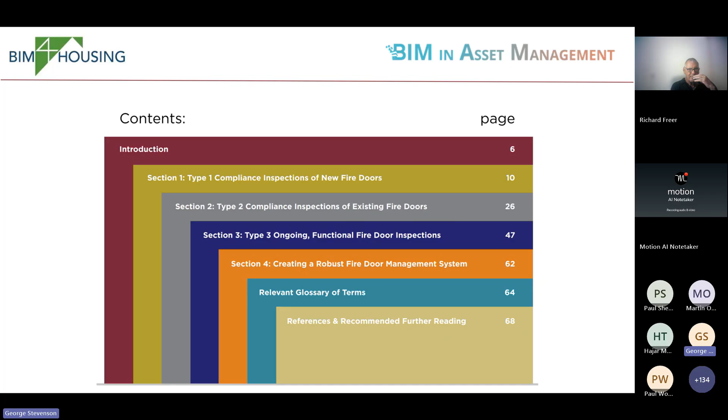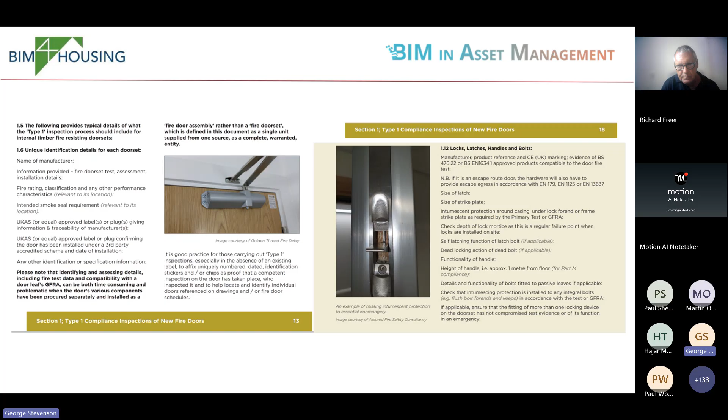Thank you. Cheers. Yeah, so right, in terms of what we've been doing recently, we've now got a new version of the fire door inspection platform guidance that we've been producing, which was developed originally with the NHS. So what we're asking people to do is to peer review this, because this is a new version of the fire door inspection document, and it's a really good document, and it goes into significant detail. So I'd like, if people are interested in doing a peer review of fire doors, could you put 'fire door review' in the chat?

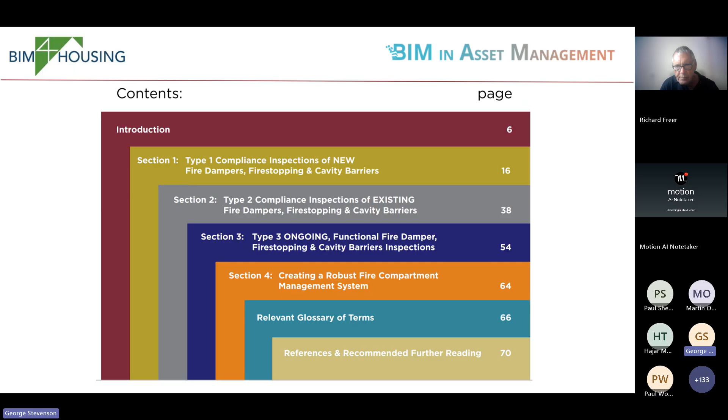The objective of this is to really get something that we can then feed into people, so we're upping the game. What we've also got is one for fire stopping and cavity barriers, so again we'd like people that have an interest in any of those asset types. If you'd like to be part of the peer review before the thing is published, please put your name, or put 'dampers and fire stopping' in the chat.

Okay, what we've also been doing - the whole point about this is to upskill the industry. So we've been working with the Supply Chain Sustainability School, which is an organization that provides free training to SMEs. It's funded by most of the big corporations, and many of you possibly are working for organizations that fund and support the Supply Chain Sustainability School. But what we're doing is using this to actually provide training, and we're doing this on the back of the various different groups that we've got working.

So for example, we've got the Digital Asset Capture group, and if you're part of that group, that's great, you'll probably see your name here. But if you aren't part of it at the moment and you want to be, I'm just going to step through a few of them. If you could put 'DAC', for example Digital Asset Capture - this is the same as 360s, by the way, so we talk about both - put that in and we'll invite you, and you can be part of that group.

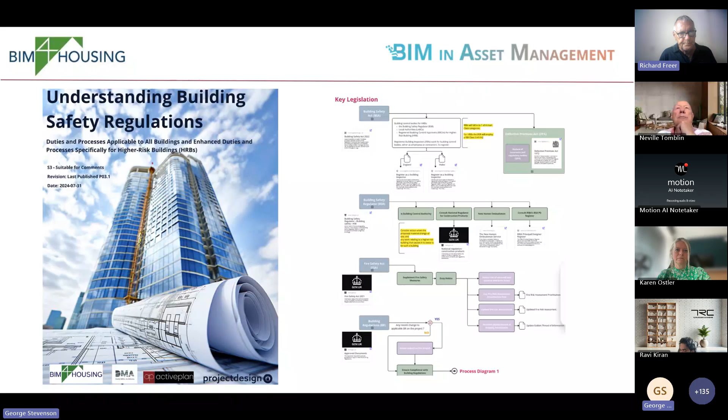This is the Miro board. It was created by a group of us in BIM for Housing, interpreting the new regulations in a common way, because everybody's got a different interpretation of what the regulations require us to do. So the Miro board was set up for the team to bring that together, and it's a fantastic resource. These are the people who have already registered. You can go on there, find information, and importantly ask for information too, and one of the other team members will probably be able to help you.

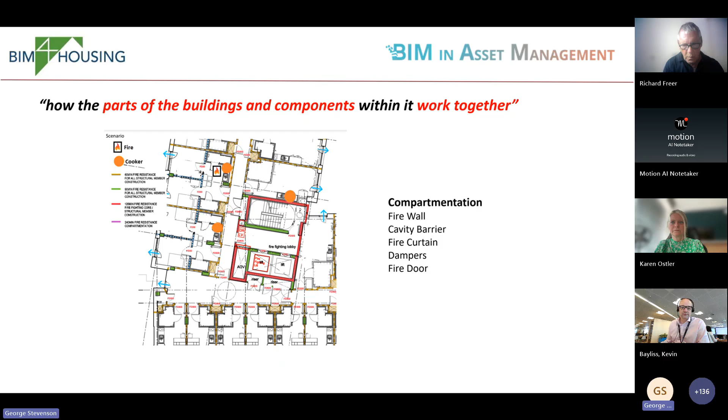Largely it's compartmentation, and the whole point about the golden thread, for example, is to make sure that all of the assets that go to make up a compartment wall are valid and working. The challenge is that we're getting, and it's great, lots and lots of golden threads being handed over at completion. But how do we tie them all together?

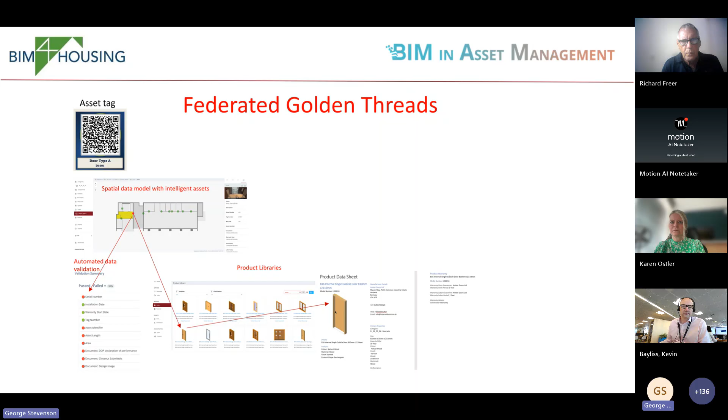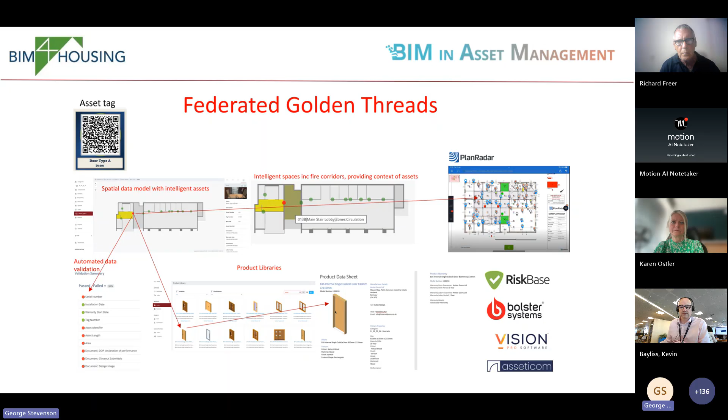How do we tie together the BIM models, the floor plans, which are often separate drawings, and then how do we ensure that inspections being done are actually going to pick up the same asset? And therefore, if you've got other really good software applications being used, they need to refer back to the same asset.

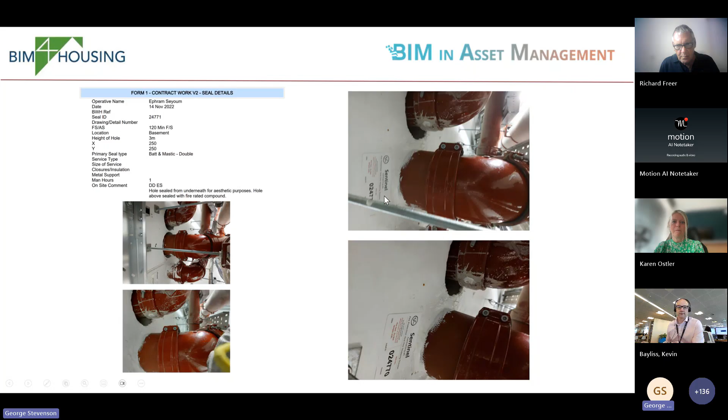So what we're doing now is using this to say, okay, the handover information may be perfect for handover. This is from a live job we've been doing with Places for People. The fire stopping contractors used an application called Boris, and really good records of what they've installed—they've barcoded every single fire stop, and you'd think that was fantastic.

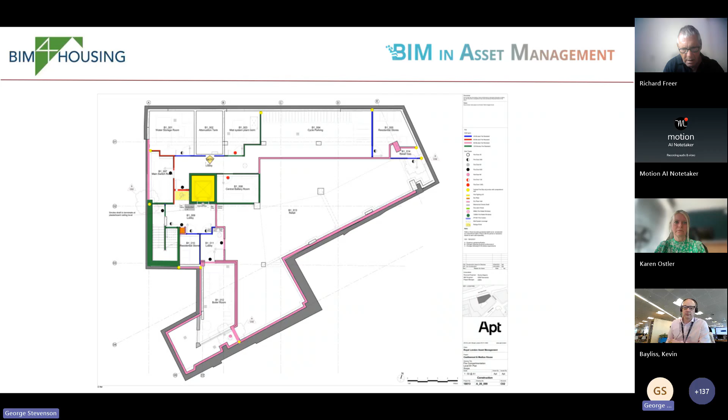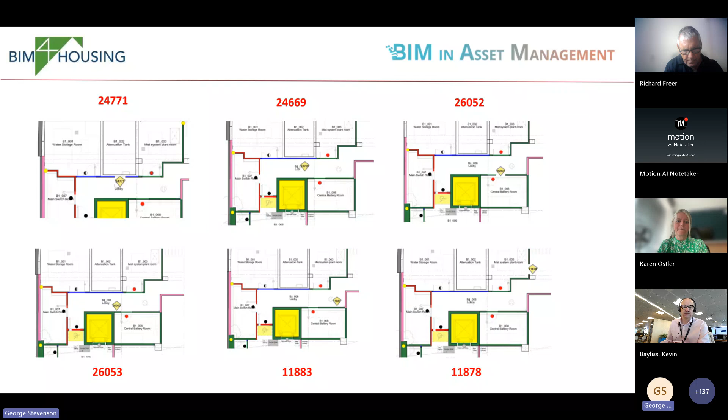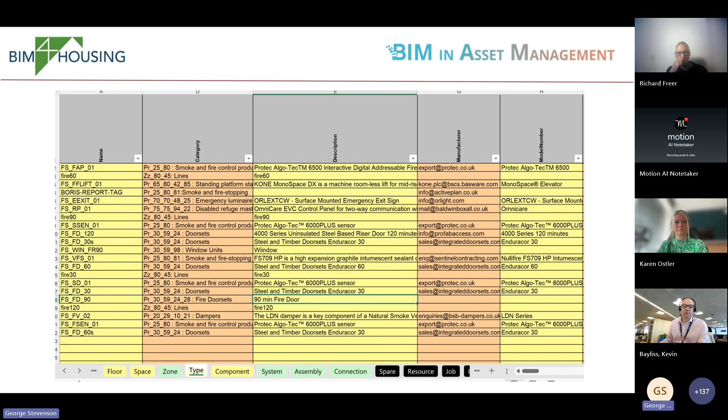So in this particular case, we used a combination of data engineering and AI to scan through the fire stopping report and extract the locations of all the fire stopping assets. The contractor did a really good job because everyone has got a unique ID, so we can use that. We then picked up that unique ID and used it, including the coordinate information, to generate an interactive plan.

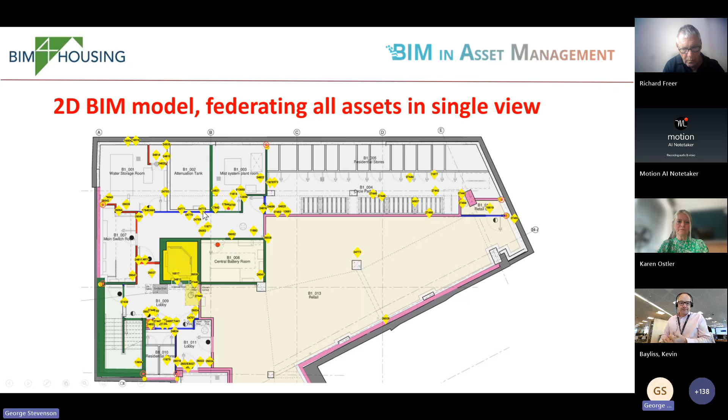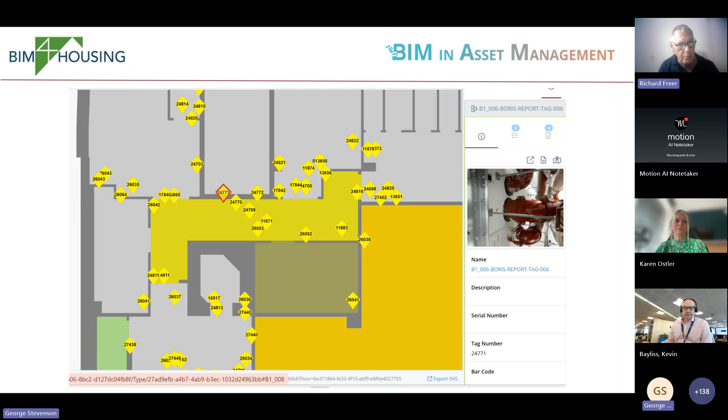So what this is doing here, every single fire stop is presented on a single floor plan. You can also overlay the fire doors and other safety critical assets, and importantly, you can move from fire stop to fire stop to find out what the report is, and it can also pull out the information from the PDF.

We're turning the PDF into machine readable data through data engineering. We've got a group within BIM and Asset Management who've signed up to be part of the data engineering effort. There are some very smart people using a lot of tools to extract information, so we're bringing them together with people who want to learn. If you're interested in data engineering, put it in the chat and we'll include you in our work in this area.

The other thing we did at Digital Construction Week was speak to a lot of the other software companies exhibiting there, and all of them agreed they are very keen to work with us within BIM and Asset Management. Importantly, some of them are competitors, but they're willing to work collaboratively and share what they're doing with us and you. I think that's a really positive sign.

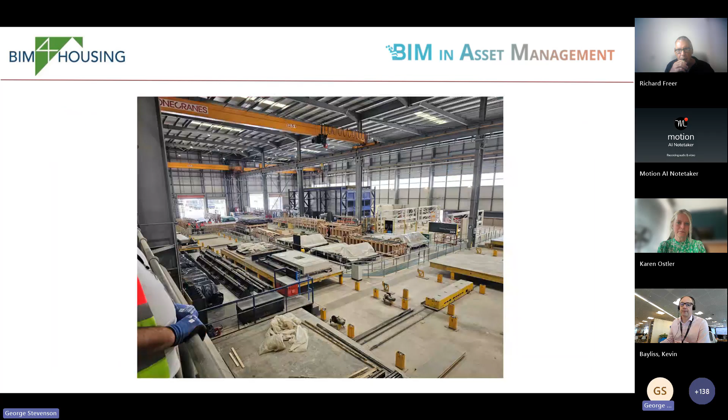The other thing since the last forum meeting, a couple of us went to the Laing O'Rourke factory for the Build Offsite Alliance, and had a tour of the factory, which was fantastic. I've now been asked to speak at the housing conference next week at the National Door Summit. So broadly, that's what we've been doing over this last month or so.

So can I hand back to Richard? And we'll do some Q&A. Right, who's got... there's quite a lot to digest there, I think, in half an hour, isn't there? Has anybody got any queries, questions or comments? What do you think about what you've heard so far? If you don't volunteer, I will pick on you.

Hi Richard, it's Sandy Coldridge. Again, very interesting, lots of really good information in these sessions. One thing that worries me, having recently taken handover of two large residential developments, is the asset information - obviously being the developer's single source of information, for me it becomes an issue. I've flagged it internally and with the developer, as unfortunately they create a WeTransfer link from site, because we can't get access to it for their information directly. They do a WeTransfer, and once we do that, we cease having a single source of information - we then have uncontrolled copies, and internally it gets copied further.

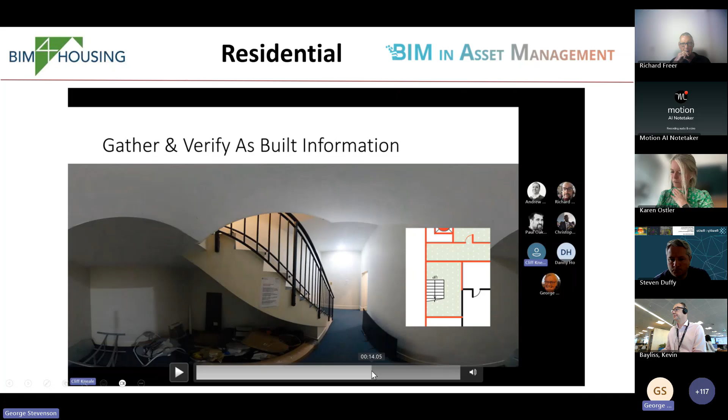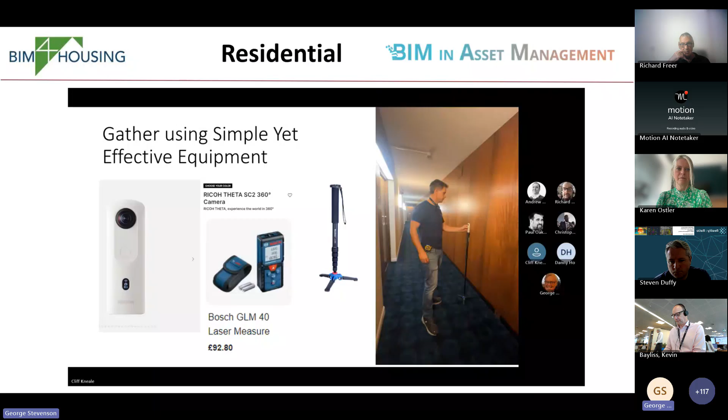Part of the issue is that it's not clear which is the right floor plan, and I think everybody's probably experienced this as well - there's different versions of that. So what we're doing here is making it so that we can go from that and take 360 photos.

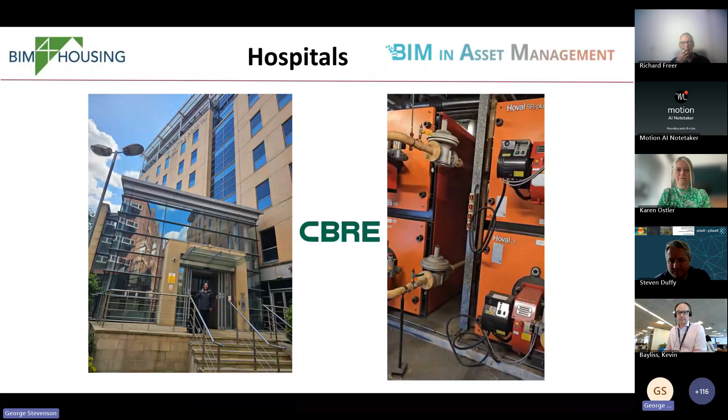Also, we're moving into other areas. This is Carolyn Flynn, who I think is on the call from CBRE. This is something that Carolyn and I did in Leeds. This is largely my incompetence here at being able to do 360s, but if I can do it, anybody can. Carolyn was helping me - she'd got some experience of this as well, so she took over from me. Carolyn, would you like to say what we're doing here?

Is Carolyn on the call? Yeah, I'm on the call. Thanks, George. Hi, I'm Carolyn.

I'm from CBRE, asset manager there. George came over onto site for the day on one of our sites. The particular site we went to has got six plant rooms, so it was quite helpful to go through each one because it helped us show what each plant room holds. Bear in mind I'm on a contract that's national, so head office being in London and not everybody being able to get round to our sites - so this helps, well, this helped us.

What I want to bring in with the 360 is to help our client - when I'm talking assets to them, to say look, this is what's in the plant room and this is what we need to work on, or what needs remedial work done to it. At the same time it also helps me when I move from site to site to know, oh yes, this site has got this, this site has got that. And it goes back into the whole labeling that George and his data team do behind the scenes for us.

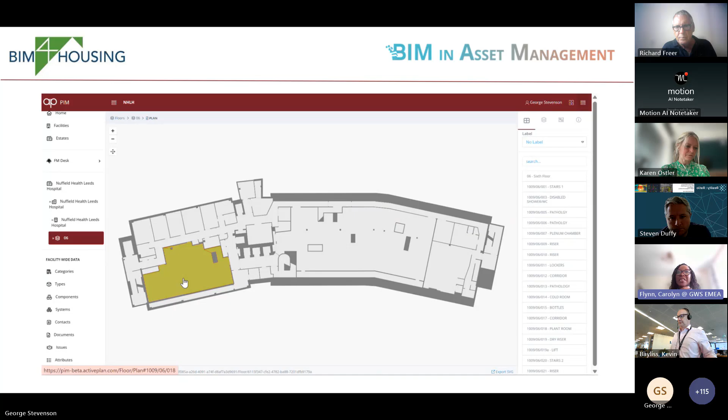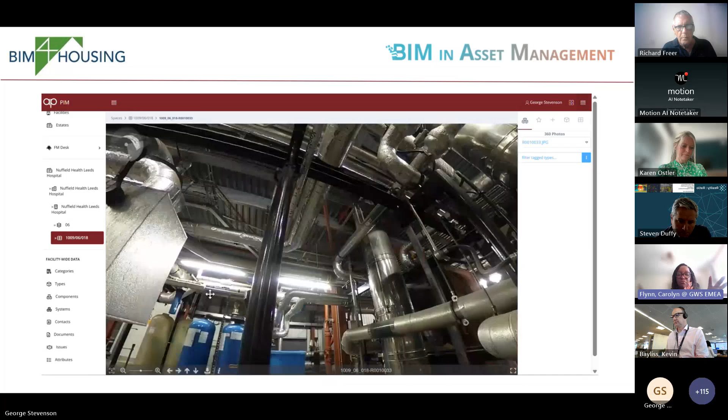At the moment we're concentrating on the plant rooms because obviously GDPR in public areas, it's healthcare, so we're not really doing the wards, but eventually would like to get there, get round to doing the fire doors and identifying our various fire doors where they are and move along. But yeah, overall it was an enjoyable day, George - we learned, didn't we?

George, is he there? George, you're on mute. Yeah, I know, I was trying to get to it. Sorry, sorry - somebody came in just as Carolyn started talking there, and therefore I went on mute to try and address that.

That's exactly right - we had a great session today together, I learned a hell of a lot. I'd also like to say that if anybody else wants to either borrow a camera or to work with us on this to carry out something on their buildings, we're very happy to help.

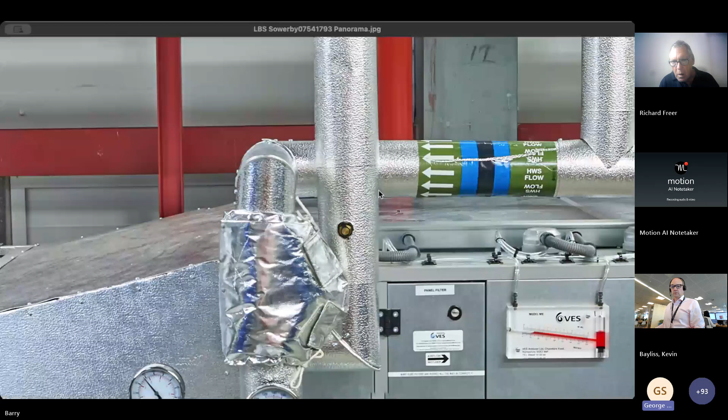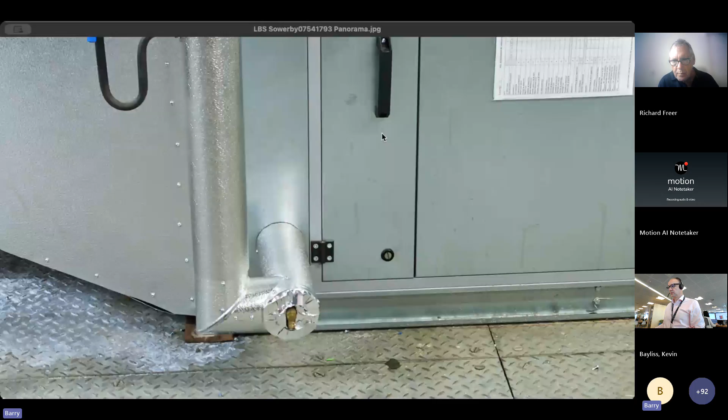That's it, brilliant. Okay, so this is a plant room in a data center I've been working on, and basically I'll need to hold on a sec, I need to zoom out here. I've got my mouse. I'm trying to do this in my car at the moment because I'm out and about doing work.

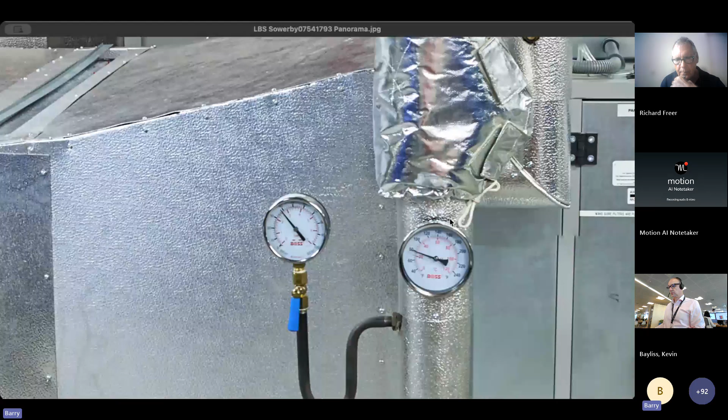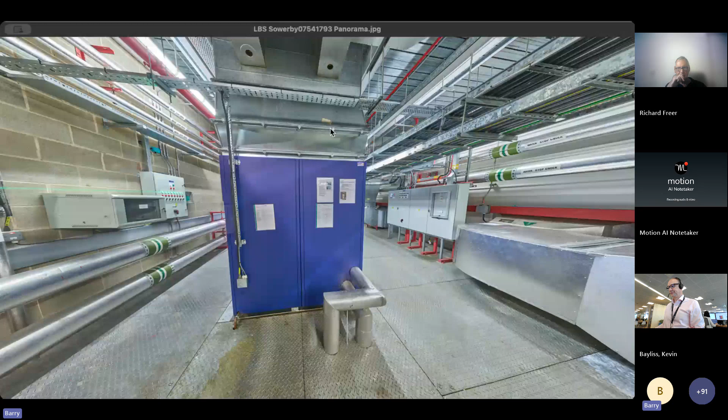So, okay, excuse me while I sort this out. This is the level of detail that we can get from the 360s, and that's what we're going to be highlighting next week. We can actually zoom into an amazing amount of detail. But that's not the real issue. The real issue is what happens in, say, the roof, because although these cameras are great, quite often these are poorly lit.

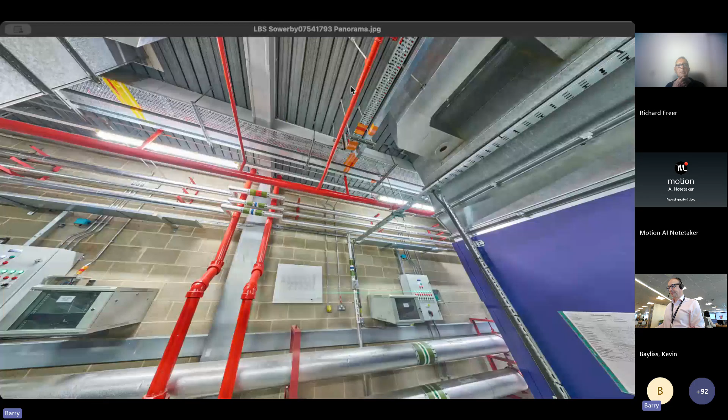And I wanted to show you an example of this. I'll have to share my screen again. Stop sharing that and share another image. Hold on one second. Can you see a roof space now? Not yet. No, okay, that's me. Hold on a minute, I need to share that particular screen. That's a window, and it's just roof space.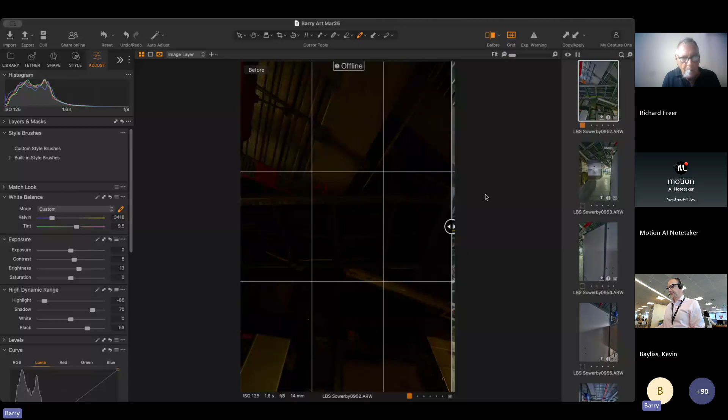Okay, so that would be the normal lighting, and this is when we've done a bit of fiddling about. So this is a really simple way of using 360 imagery without lighting to see all the details that are normally hidden.

So that's what we're going to be showing at the masterclass next week, a workflow for how to do that. Does that make sense? So that's sort of what it looked like before, and that's what it looks like after. And if I zoom in, you'll see the level of detail that we can see from this.

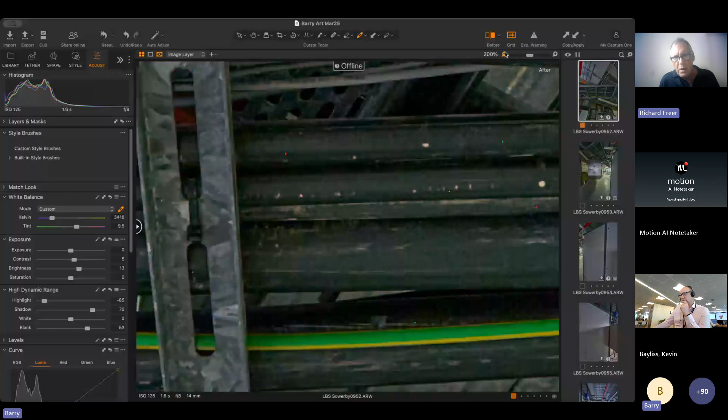Now, these are all 360 imagery that you can then use and tag in whatever software you choose to do it with. Obviously, there's one or two systems out there which are ideally suited for this. But the challenge when you're using 360 imagery is just the lighting in a building, and some of the cameras are very good at using them and some aren't. So we're going to show you how you can get around this problem.

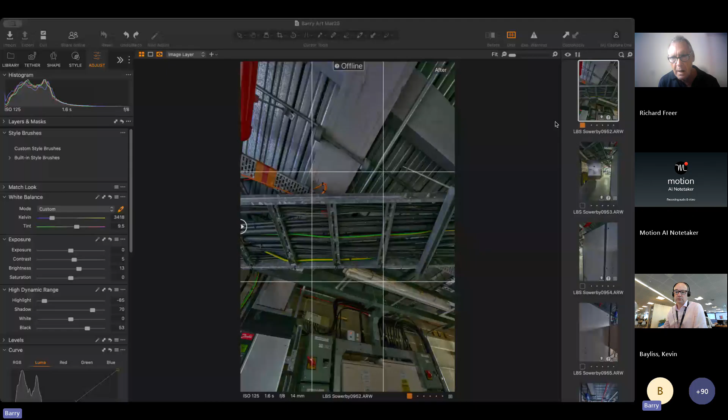Kev, are you on the call at the moment? I am, yeah. Yeah, so could you just explain what you've been doing with 360s?

Well, so when we started to think about capturing assets, but also we've got to deliver a building safety case both to the regulator, information also to the fire service, and we've got to provide our residents with information on fire safety as well, we came up with the idea of doing the 360s for each block. So I've sent you a link, George, for you to have a look at it.

So what we decided to do initially was think about the resident and how we can provide that information, but also the fire service and colleagues as well, in as many different understandable formats as we can. So we thought the 360 walkthrough for each block is probably going to be that format. We also put avatars on that you could pick languages from. So it introduces the block, it says what we're trying to do to that block, and it gives you directional arrows to go to so you can do a walkthrough of the block.